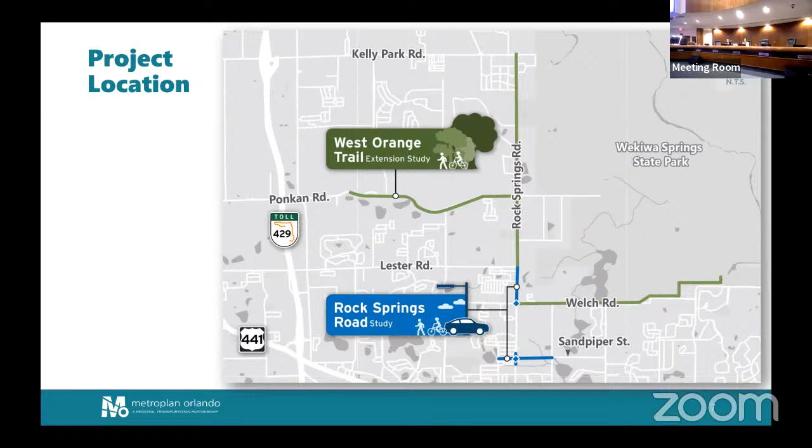The West Orange Trail extension study limits are from the existing West Orange Trail terminus at the intersection of Rock Springs Road and Ponkan Road to the proposed Wekiwa Trail extension at the intersection of Rock Springs Road and Kelly Park Road. The trail extension study is also proposing additional connections to the Wekiwa Springs State Park entrance via Welch Road and to the Wolf Lake Elementary and Middle Schools, as well as the City of Apopka's Northwest Recreation Complex via Ponkan Road. These studies are being done simultaneously due to their proximity and similar schedules.

A traditional project lifecycle consists of 4 steps: planning, design, right-of-way acquisition, and finally construction. We are currently in the planning stage for both projects. During the planning phase, the project need is identified, improvement strategies are evaluated, and a recommendation is selected to move forward to the design phase. Timing for each phase is dependent upon available funding.

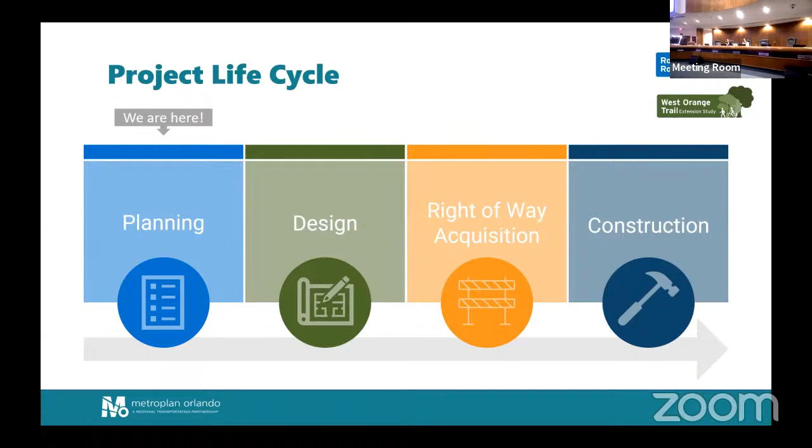So it is essential during the planning phase to have ongoing public engagement, like what we're doing tonight. At the beginning of the study, an online survey was conducted to gather initial input from the needs of the corridor. On January 27th of this year, we conducted our first community meeting to present the alternative concepts for each project. A virtual meeting room was held open to review these concepts through the end of February, in addition to a survey that was given to gather feedback on the alternatives considered. Tonight's meeting is being held to share the study recommendations for public input, and a final survey will be made available following this presentation tonight to gather feedback on the proposed improvements being presented.

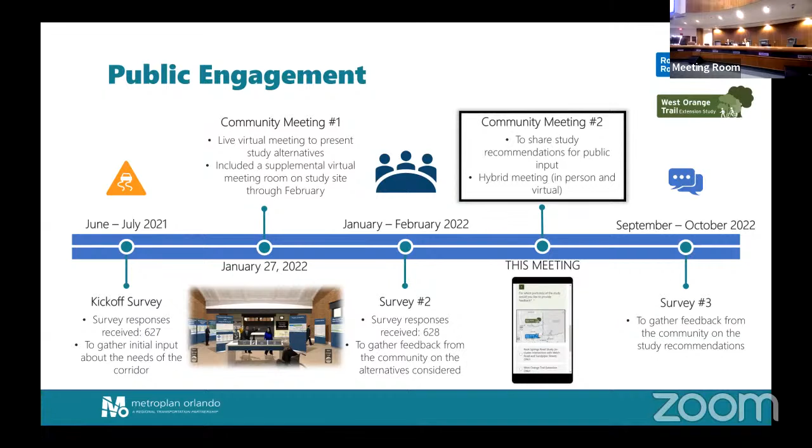So the study recommendations being shown today have been selected as part of the alternative development and refinement process. This process begins with the alternatives development, where alternative concepts are preliminarily evaluated and compared, and then shown to the public for local input. After gathering feedback from the community, the alternatives are refined and analyzed to select the study recommendations to move forward to the design phase of the project.

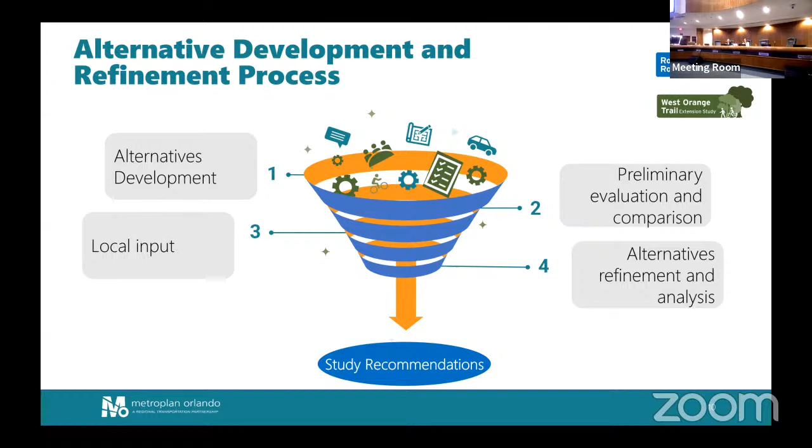Okay, we will now look at the recommendations for each of these studies. We're going to begin with the Rock Springs Road study. We're going to first show you a short clip that's going to include a flyover of a rendering of what the proposed updates will look like along Rock Springs Road corridor if this is selected.

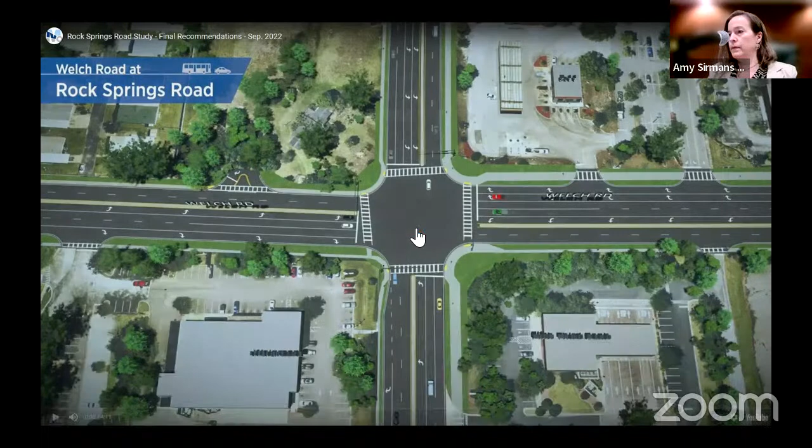The purpose of the Rock Springs Road study is to evaluate safety and access improvements at the intersection of Rock Springs Road and Welch Road, and along the half-mile of Rock Springs Road from Welch Road to Lester Road. The study also includes an intersection analysis and evaluation for the realignment of the intersection of Sandpiper Street with Park Avenue, and recommends improvements to the studied facilities.

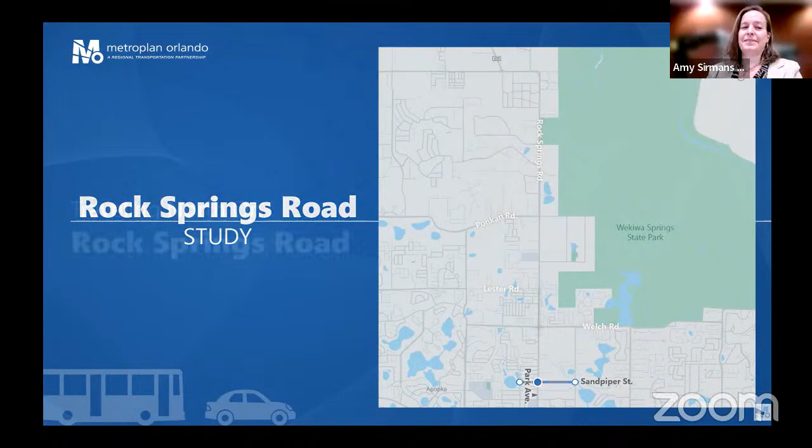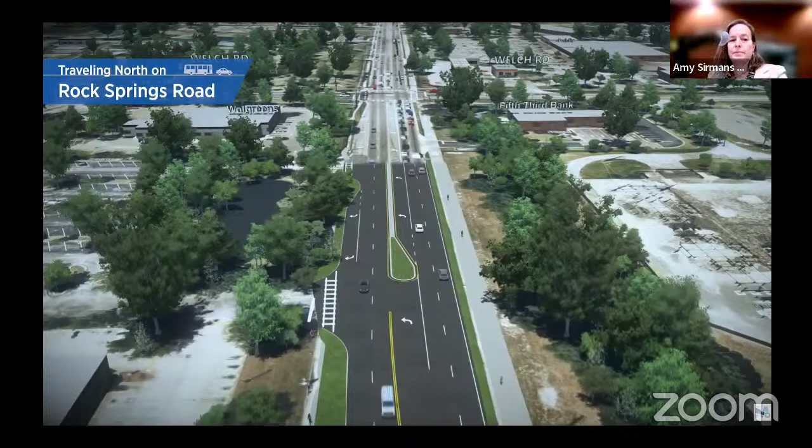Let's start by looking at the recommended design of the Rock Springs Road and Welch Road intersection. Traveling north on Rock Springs Road, the proposed improvements begin just south of the intersection of Rock Springs Road at Welch Road. A new traffic separator begins at the start of the northbound left turn lane.

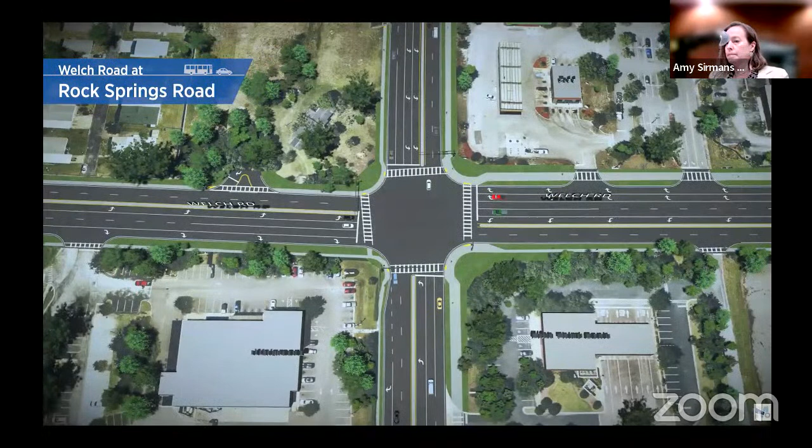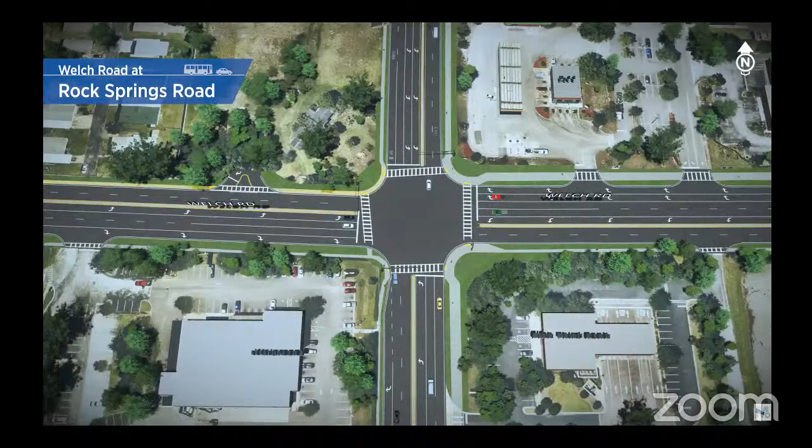At the intersection of Rock Springs Road and Welch Road, the proposed improvements include dual southbound left turn lanes, a dedicated right turn lane for Rock Springs Plaza and Walgreens, and two through lanes for both eastbound and westbound lanes on Welch Road. New traffic separators are recommended between opposing directions of travel at each leg of the intersection to improve safety by restricting left turns out of driveways in the vicinity of the intersection. A new sidewalk runs along the north side of Welch Road from Rock Springs Road to the Palm Isles community.

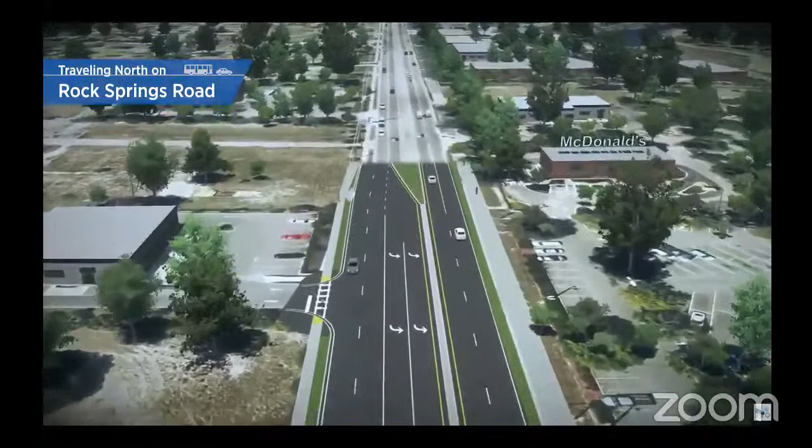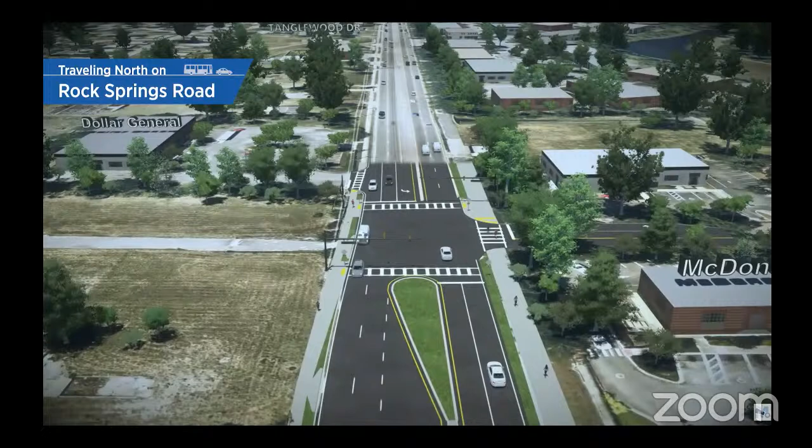Heading north on Rock Springs Road, the traffic separator continues until reaching the north entrance to the Publix Plaza at the McDonald's. At the Publix north entrance, a new signalized intersection is recommended to improve operations and safety. The recommended improvements include a dedicated southbound left turn lane, right and left turn lanes when exiting the plaza, and new pedestrian crosswalks.

The traffic separator begins again on the north side of this intersection and continues north for approximately 320 feet. After the proposed improvements at the intersection of Rock Springs Road and Publix North entrance are implemented, the operations of this intersection will be analyzed. If the improvements do not sufficiently meet the pedestrian crossing needs, the addition of a mid-block crossing with rectangular rapid flashing beacons, also known as RRFBs, will be considered between the Publix North entrance and Tanglewood Drive.

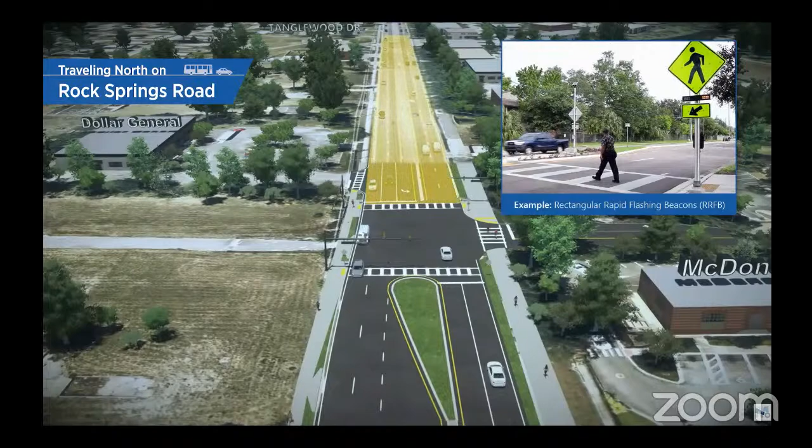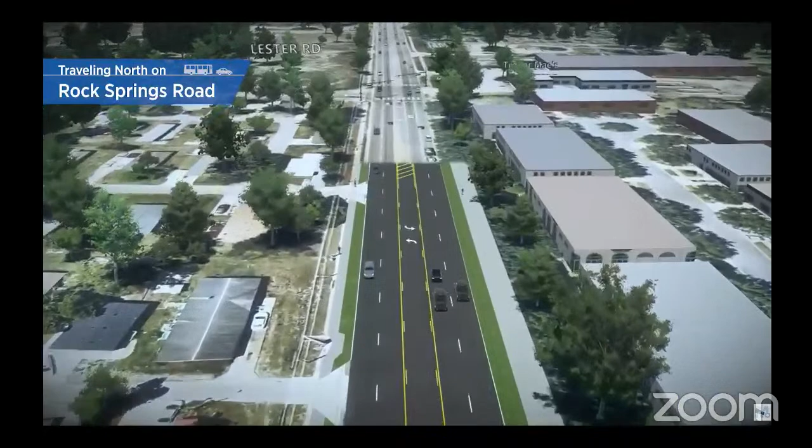The recommended improvements to Rock Springs Road and just north of Lester Road. At the southern end of the corridor,

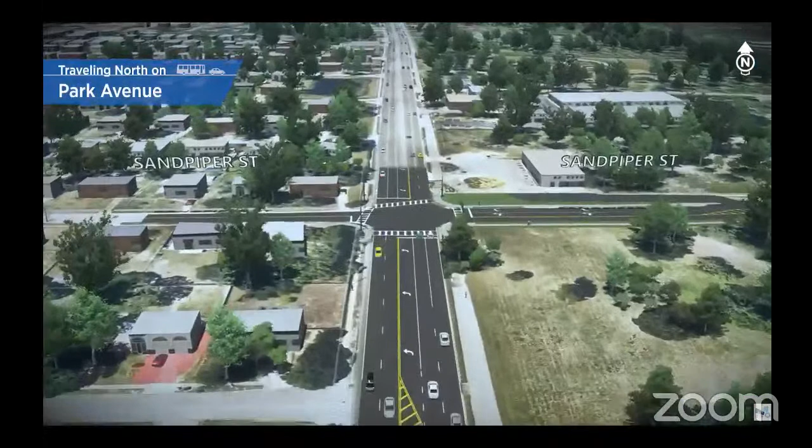improvements are proposed at Park Avenue and Sandpiper Street. Traveling north on Park Avenue, the improvements begin just south of Sandpiper Street. A new traffic signal is recommended at the intersection of Sandpiper Street and Park Avenue.

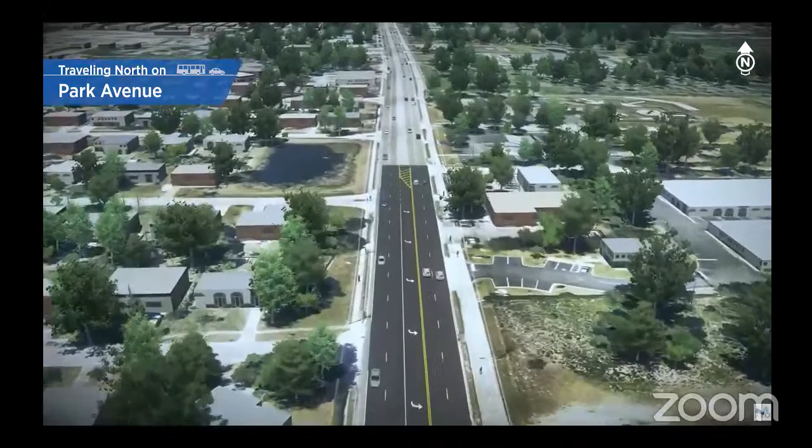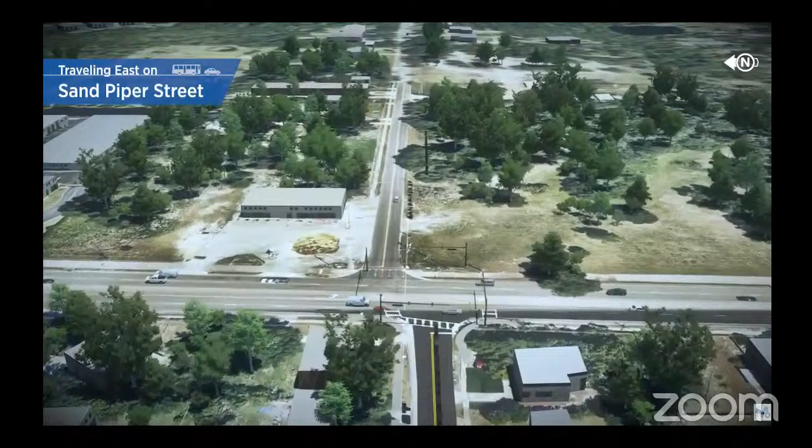Traveling east on Sandpiper Street, the proposed improvements include the realignment of the east leg of Sandpiper Street and a new sidewalk along the south side of Sandpiper Street from Park Avenue to Ustler Road. A new sidewalk is also recommended along the north side of Sandpiper Street from Lake Avenue to Park Avenue.

So to recap what we saw in the video, the following are recommendations to improve operations and safety as part of the Rock Springs Road study.

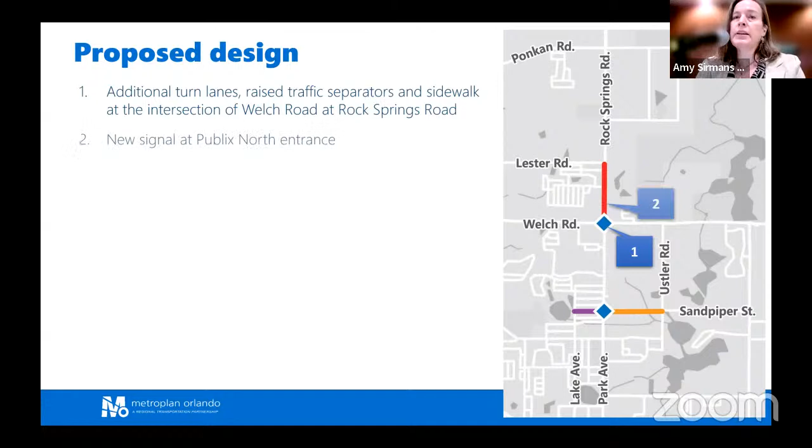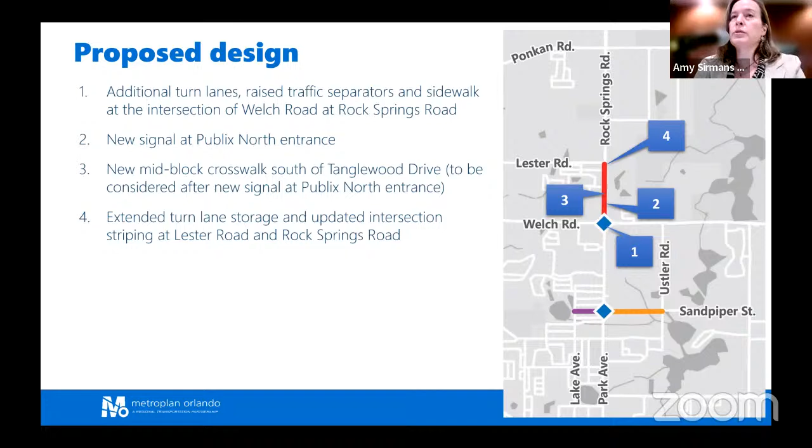Additional turn lanes and raised traffic separators at the intersection of Welch Road at Rock Springs Road. A new signal at the Publix North entrance near the McDonald's and former Bubbaloo's restaurants. A new mid-block crossing or crosswalk south of Tanglewood Drive, which will be considered after the new signal at the Publix North entrance is implemented. Minor intersection updates at the Lester Road and Rock Springs Road intersection to allow for additional space for vehicles in the turn lane. The realignment and a new signal at the Sandpiper Street and Park Avenue intersection. New sidewalk along the north side of Sandpiper Street from Lake Avenue to Park Avenue, and new sidewalk along the south side of Sandpiper Street from Park Avenue to Ustler Road.

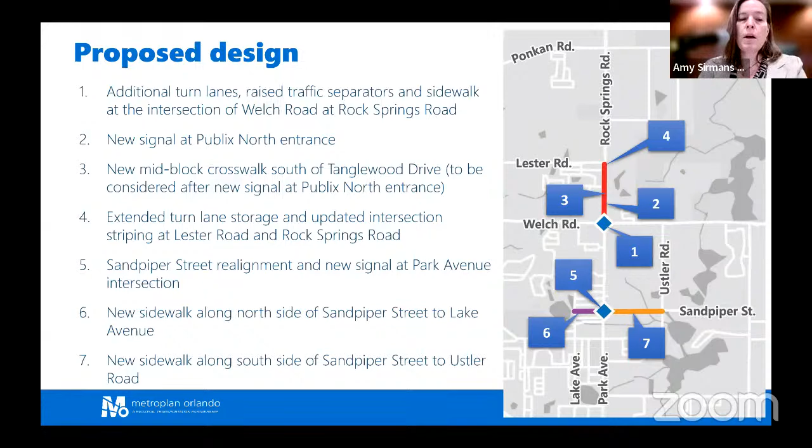The following updates are recommended at the intersection of Welch Road and Rock Springs Road. We're looking at dual southbound left turn lanes and a new traffic separator at the start of the left turn lane at each leg of the intersection to restrict left turns in and out of adjacent driveways, a portion of which will be installed along with the proposed development in the northwest corner of the intersection. Two through lanes for both eastbound and westbound on Welch Road, dual westbound dedicated right turn lanes, and a new sidewalk on the north side of Welch Road from Rock Springs to the Palm Isle community.

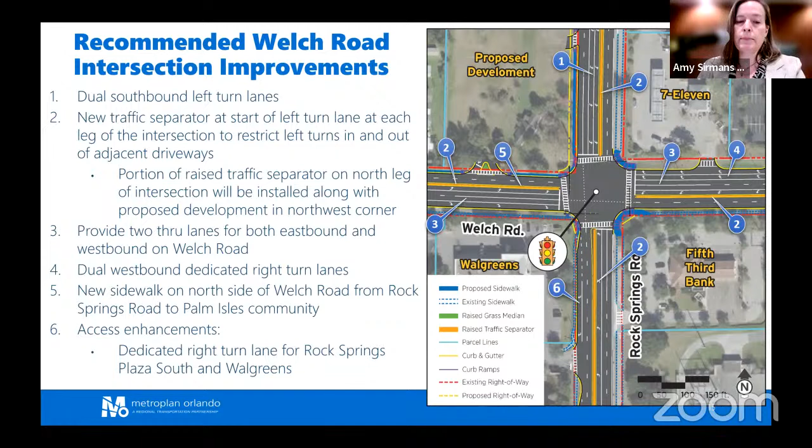Access enhancements are also recommended at the intersection, including a dedicated right turn lane for Rock Springs Road Plaza South entrance and the Walgreens. The recommended traffic separator proposed between opposing directions of travel at each leg of the intersection is a narrow concrete barrier that prevents vehicles from crossing lanes of traffic. The traffic separators will enhance safety by restricting left turns in and out of driveways in the vicinity of the intersection.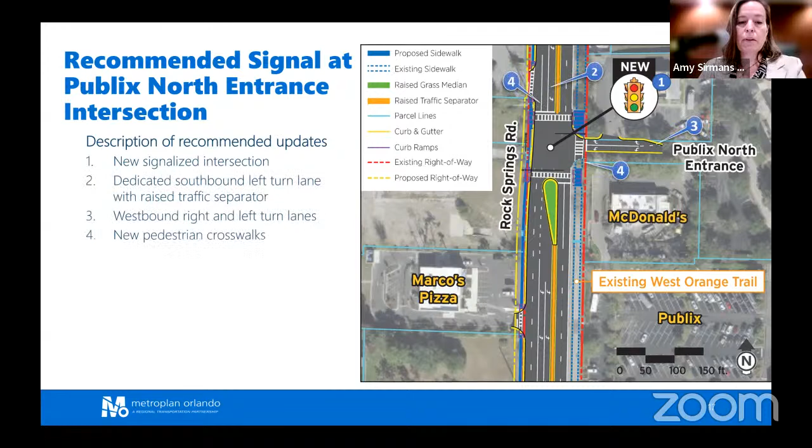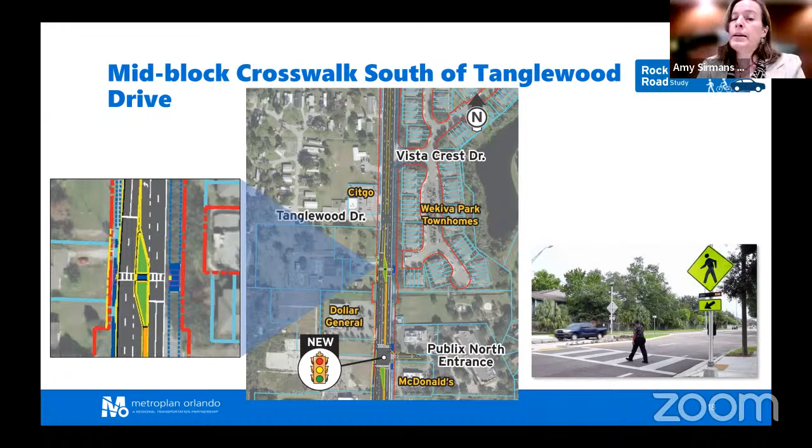A mid-block crosswalk is recommended south of Tanglewood Drive. The mid-block crosswalk includes a raised median island with opportunities for landscape. Rectangular rapid flashing beacons, also known as RRFBs, would be installed along the crosswalk to enhance visibility of pedestrians. This recommendation will be reevaluated based on community needs after the installation of the Publix North entrance signal.

At Sandpiper Street and Park Avenue, the recommended improvements include the realignment of the east leg of Sandpiper Street and the addition of a signal at this intersection.

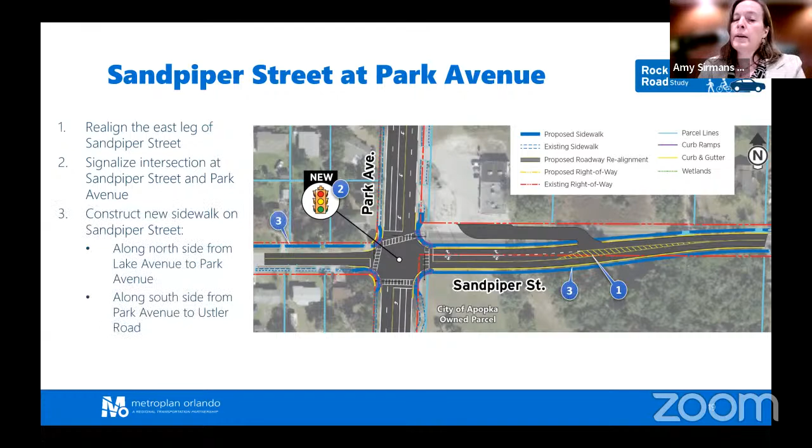The study is also recommending the construction of new sidewalk along Sandpiper Street between Lake Avenue and Ustler Road. The new sidewalk would be provided on the sides of the street that currently do not have sidewalk, specifically along the north side of Sandpiper Street, west of Park Avenue to Lake Avenue, and along the south side of Sandpiper Street, east of Park Avenue to Ustler Road. This would increase sidewalk connectivity to the existing West Orange Trail.

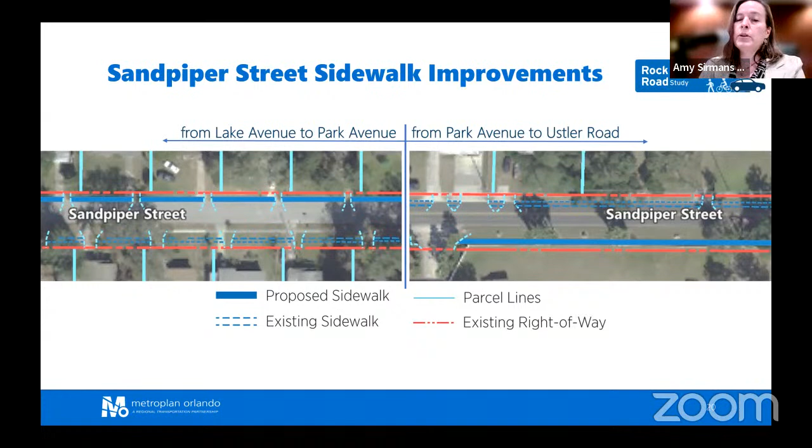An analysis was conducted on these proposed updates to determine associated environmental, community, and drainage impacts, as well as estimated total costs. An environmental analysis determined a low potential for impacts to listed species and habitats and contamination sites within the study area. There are no wetlands or surface waters located along the study corridor, and therefore no impacts are anticipated. The recommended updates are anticipated to require 0.55 acres of right-of-way, in which a portion of the right-of-way needed is planned to be donated from the upcoming development in the northwest corner of the Welch Road at Rock Springs Road intersection. Overall, the recommended updates are anticipated to enhance the community.

Regarding the drainage, the existing ponds receiving runoff from the project area have additional capacity, therefore no additional pond sites are needed. The estimated construction cost for the Rock Springs Road updates is $6.5 million, and the construction cost for the Sandpiper Street updates is $1.6 million.

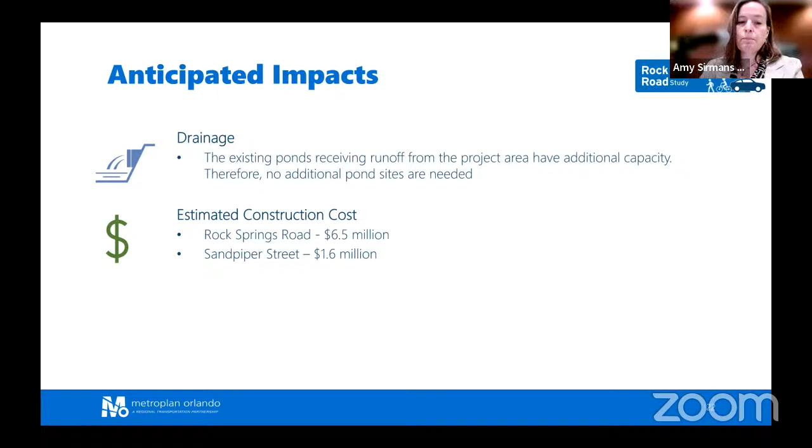We will now briefly review the Rock Springs Road study traffic analysis results. Using an evaluation measure called level of service, also referred to as LOS, we are able to relate the quality of service for a mode of travel. These figures illustrate the traffic served under conditions ranging from level of service A to level of service F. Similar to grades in school, a roadway that performs at level of service A is not congested and supports free-flowing travel. A roadway that receives a failing grade experiences heavy congestion and significant delays, as depicted in the level of service F exhibit.

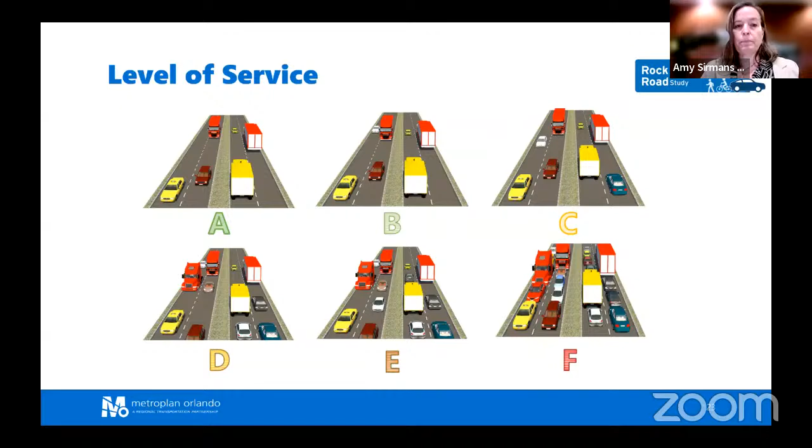The existing traffic data was collected and analyzed along the study corridor. The target level of service assigned for the study corridor is level of service E.

The existing traffic analysis shows the Welch Road at Rock Springs Road intersection in both the AM and PM peak periods does not operate at acceptable level of service, as well as the Sandpiper Street at Park Avenue intersection in the PM peak period.

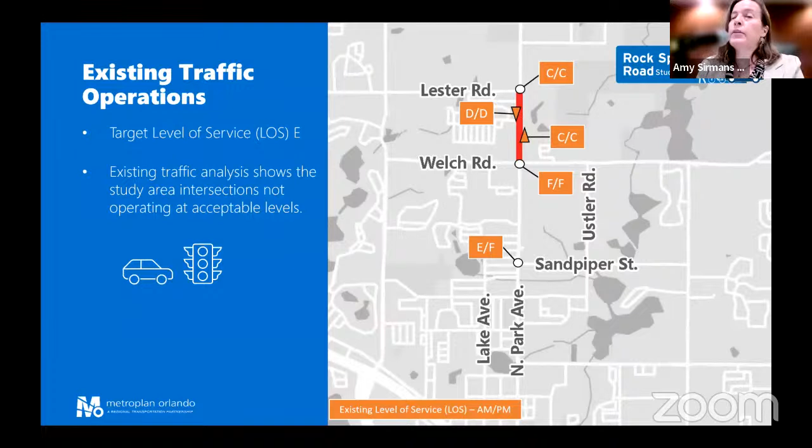Utilizing future growth projections and traffic models, a long-term growth factor was applied to project the traffic volumes within the study area to a future year of 2045.

With no additional improvements to Rock Springs Road, it is expected to experience much higher delays in the future year 2045. With the addition of proposed improvements, all operations result within the target level of service of E.

There is a reduced overall delay at the Welch Road intersection by 74% in the 2045 morning and by 72% in the 2045 PM. By implementing the proposed improvements to the corridor, the Welch Road intersection operates at acceptable levels.

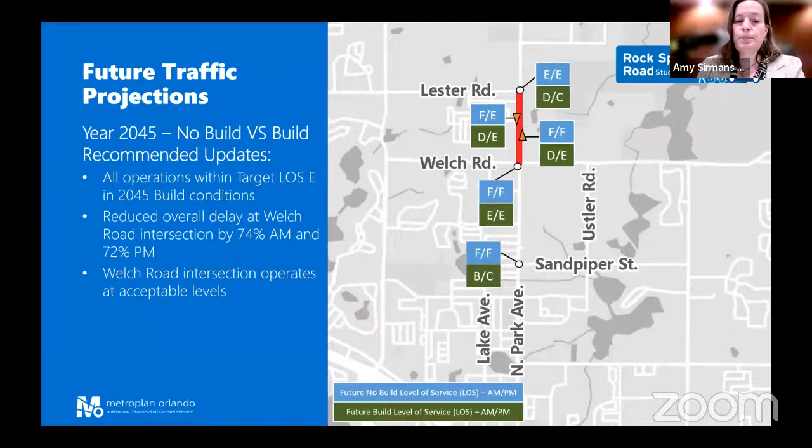Now we're going to review some of the details about the proposed updates for the West Orange Trail extension. We're going to start with a short clip similar to the previous one of a flyover rendering of what the trail could look like.

The Orange County Trails Master Plan identifies a gap in the regional trail network between the northern terminus of the existing West Orange Trail and the southern terminus of the Wekiva Trail.

Through the existing conditions analysis, public involvement feedback, and input from local agency stakeholders, several alternatives were identified to extend the West Orange Trail to the proposed Wekiva Trail, while providing connections to the Wekiva River Blueway Trail and Wolf Lake Elementary and Middle Schools, as well as the City of Apopka's Northwest Recreation Complex.

This video will take you through the recommended concept for the West Orange Trail extension and its spurs.

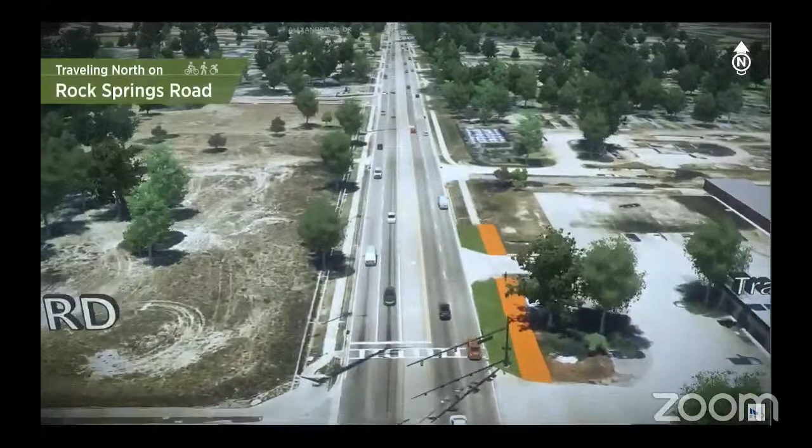The recommended trail extension is shown in orange as we have been traveling north along Rock Springs Road. The trail runs along the east side of Rock Springs Road, starting from the existing trail terminus at Lester Road until reaching Kelly Park Road.

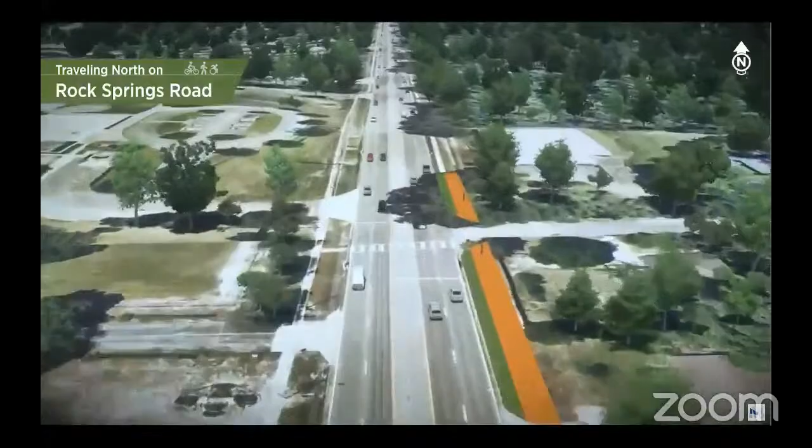The proposed trail is 12 feet wide to accommodate both bicyclists and pedestrians and adds approximately 3.3 miles to the West Orange Trail network. This portion of the West Orange Trail extension crosses 5 streets and 58 driveways.

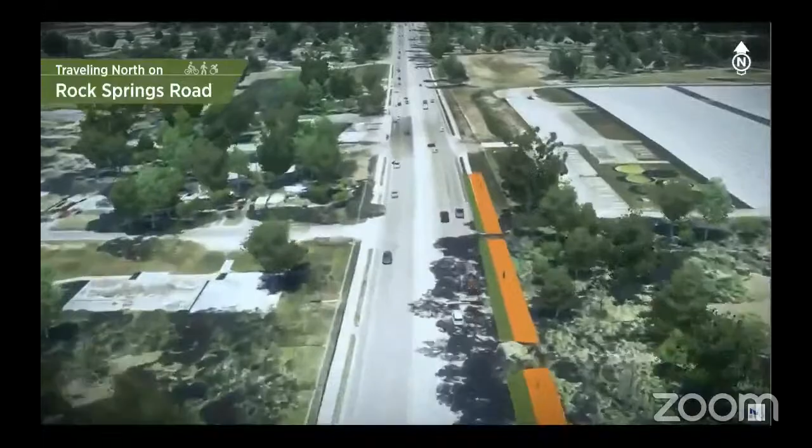The street crossings include Fay Street, Ponkan Road, Trailer Haven Lane, Pine Street, and Holly Street. In order to build this portion of the West Orange Trail extension, approximately 2.5 acres of right-of-way will be needed.

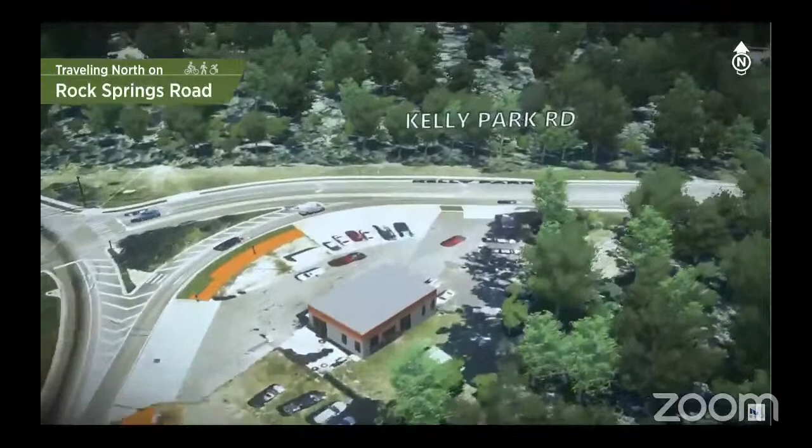As we reach Kelly Park Road, the recommended trail turns right to travel east along the south side of Kelly Park Road, and then north along the east side of Baptist Camp Road, ending at the entrance to Kelly Park.

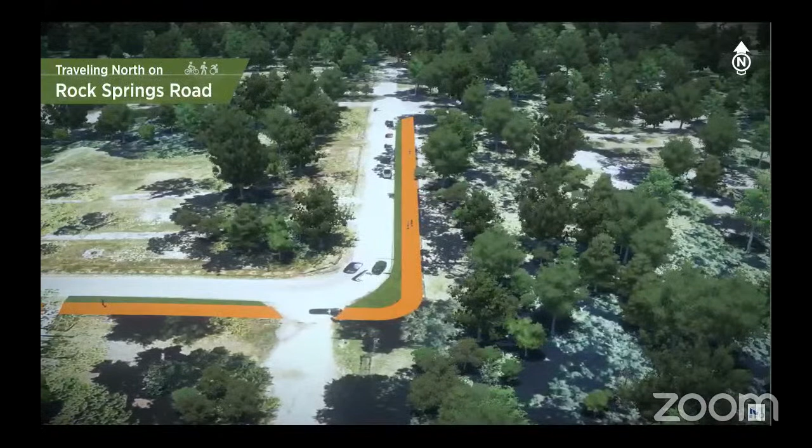Now we will take a look at the proposed concept for the Welch Road Spur. Traveling east on Welch Road, the recommended 12-foot wide trail spur alignment runs along the north side of Welch Road from Rock Springs Road to the entrance of Wekiwa Springs State Park.

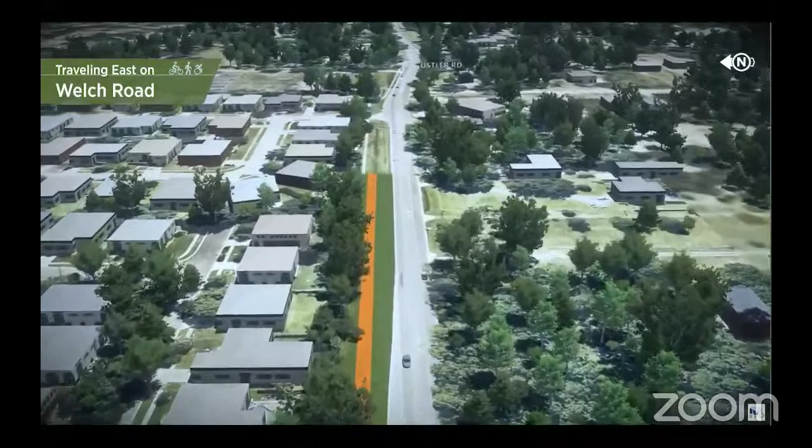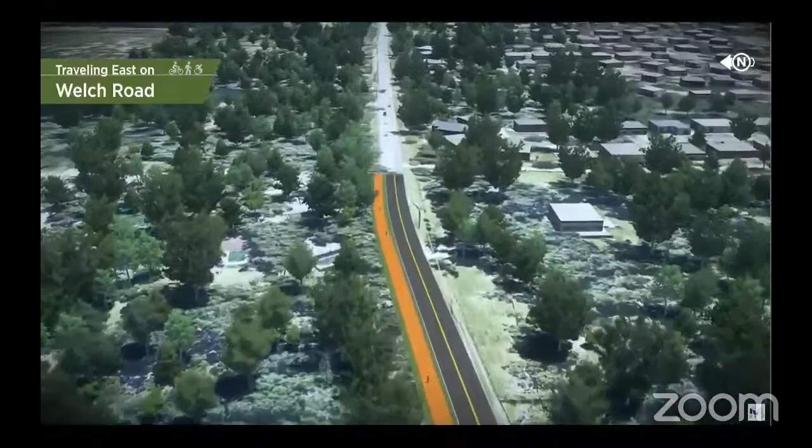As part of the recommended trail spur, Welch Road requires a roadway realignment beginning at Ustler Road in order to provide space for the trail and avoid impacts to the wall at the Wekiwa Glen subdivision. The roadway realignment will remain within the existing right-of-way.

Just west of Thompson Road, the recommended trail spur includes 2 potential locations for a natural habitat observation area. The observation areas will serve as a place to rest and provide an opportunity for wildlife viewing along the trail.

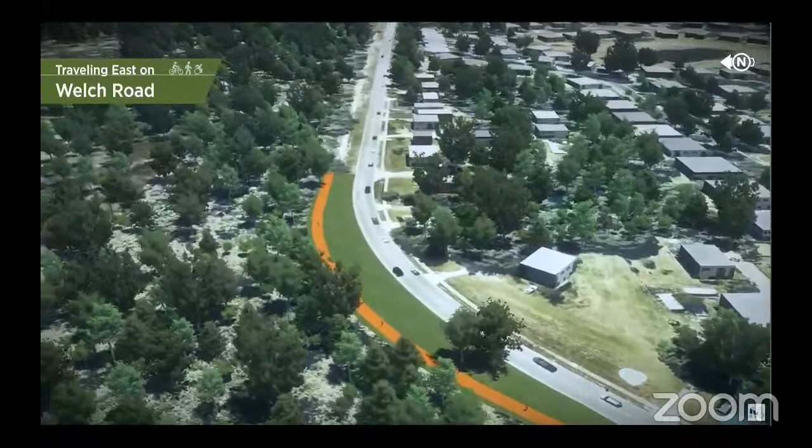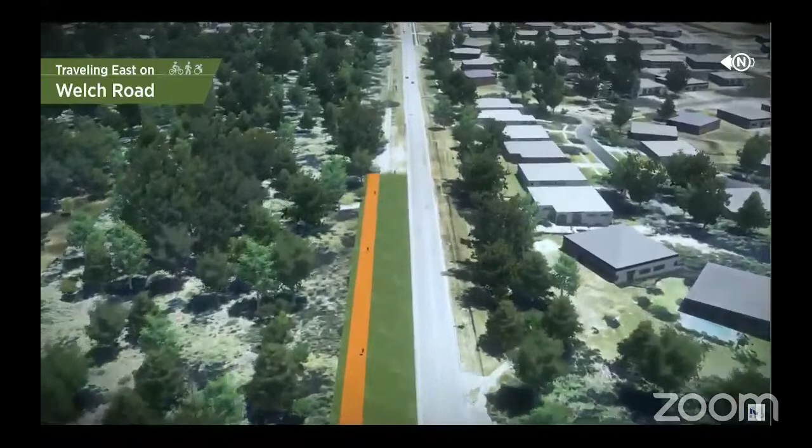The trail continues along Welch Road until just west of Sweetwater Park Village. Here, the trail heads north, then east, wrapping around the edge of the neighborhood within the Wekiwa Springs State Park property.

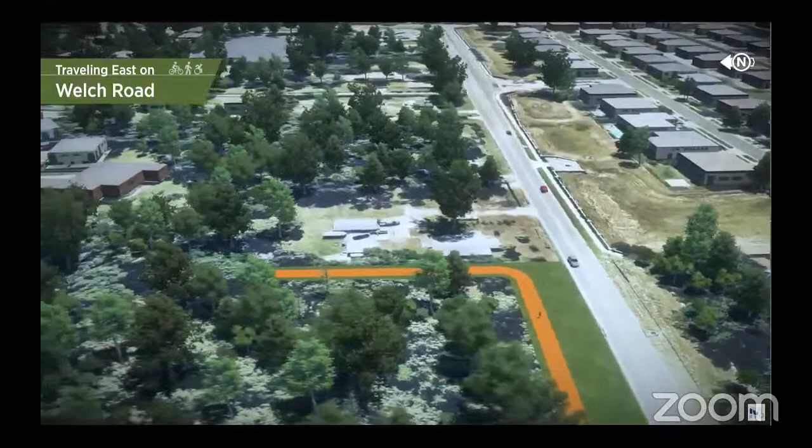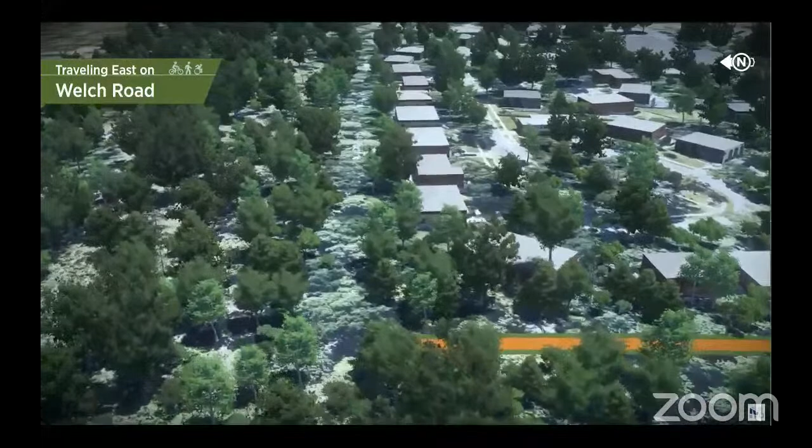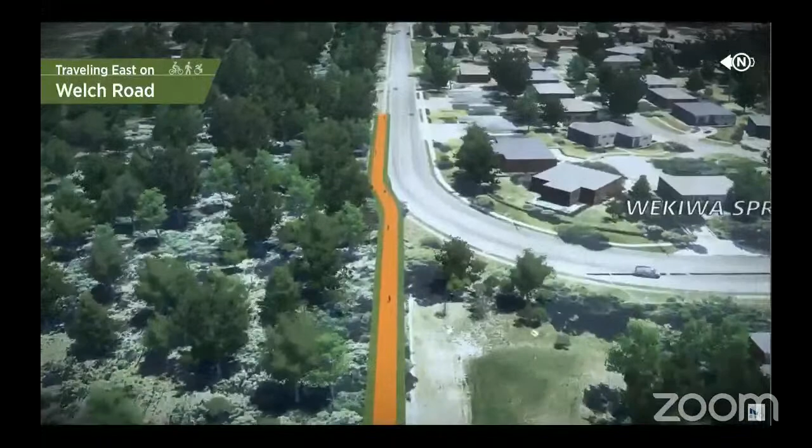The trail then connects with Wekiwa Springs Road, continuing east until the entrance to Wekiwa Springs State Park. The Welch Road Spur is approximately 3 miles in length and requires an estimated 7.3 acres of right-of-way, of which only 0.1 acres is privately owned.

The final trail spur alignment is along Ponkan Road to connect the West Orange Trail to Wolf Lake Elementary and Middle Schools, as well as the City of Apopka's Northwest Recreation Complex. Heading west from Rock Springs Road, the proposed trail spur runs along the south side of Ponkan Road from Rock Springs Road to Vic Road.

The trail will cross Ponkan Road on the east side of the Vic Road intersection, where there is an existing signal providing for a protected crosswalk.

From this intersection, the trail continues along the north side of Ponkan Road until reaching the entrance to Wolf Lake Elementary School. The recommended Ponkan Road spur is approximately 2.3 miles in length and requires an estimated 2.1 acres of right-of-way.

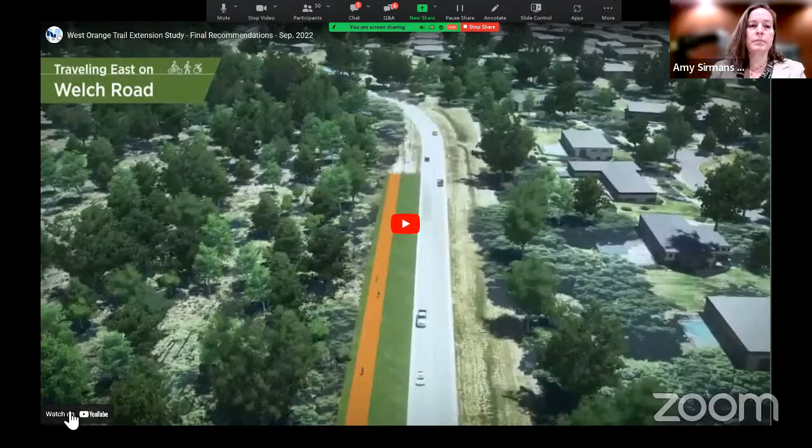So to recap from the video, the West Orange Trail Extension Study is looking at 3 different corridors: Rock Springs Road from Lester Road to Kelly Park Road, Welch Road and Wekiwa Springs Road from Rock Springs Road to the Wekiwa Springs State Park entrance, and Ponkan Road from Rock Springs Road to the Wolf Lake Elementary and Middle Schools.

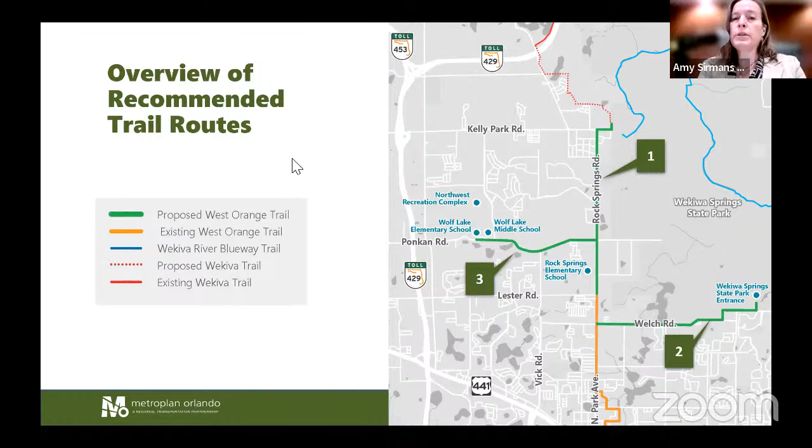Along Rock Springs Road from Lester Road to Kelly Park Road, the recommended trail extension alignment is kept along the east side of Rock Springs Road to tie into the proposed Wekiva Trail.

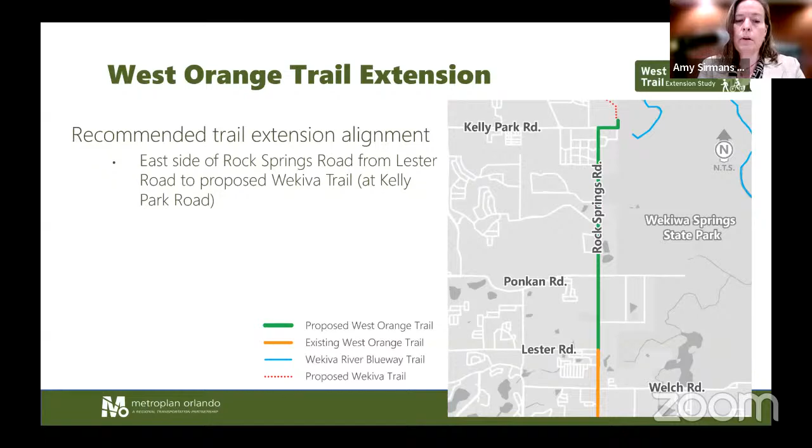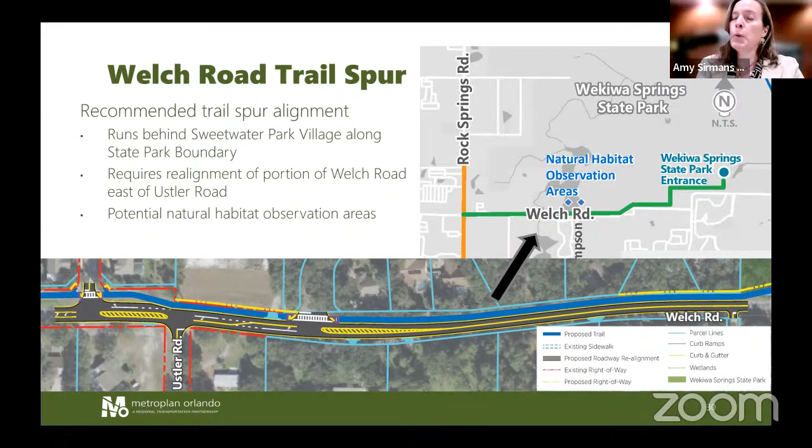Traveling east, the trail will run along the north side of Welch Road until just west of Sweetwater Park Village. Here, the trail heads north, then east, wrapping around the edge of Sweetwater Park Village within the Wekiwa Springs State Park property. Finally, the trail connects with the north side of Wekiwa Springs Road, continuing until the entrance to Wekiwa Springs State Park. The recommended Welch Road Trail spur will provide a connection to the park entrance with fewer driveway and street crossings.

The trail would follow the forest edge, providing the opportunity for more wildlife viewing away from the roadway. The Spring to Spring Trail in Volusia County is an example of what this portion of the trail could look like. The design and vegetation plans for the Welch Road Wekiwa Springs State Park alignment have not yet been developed. During the design phase, fencing may be considered to provide a buffer between the proposed trail and existing properties.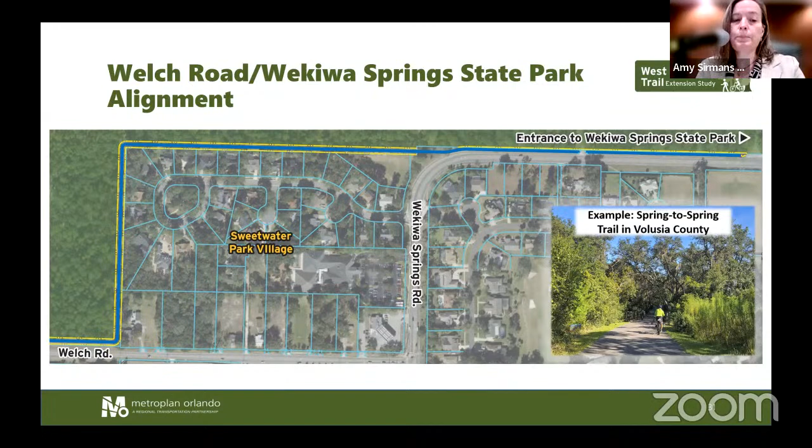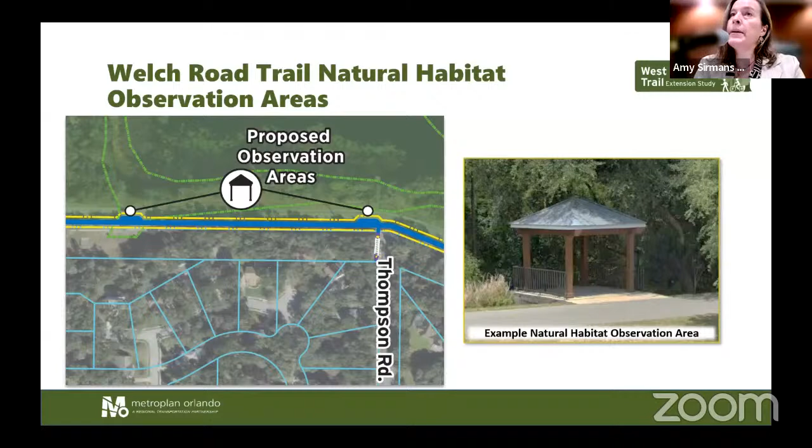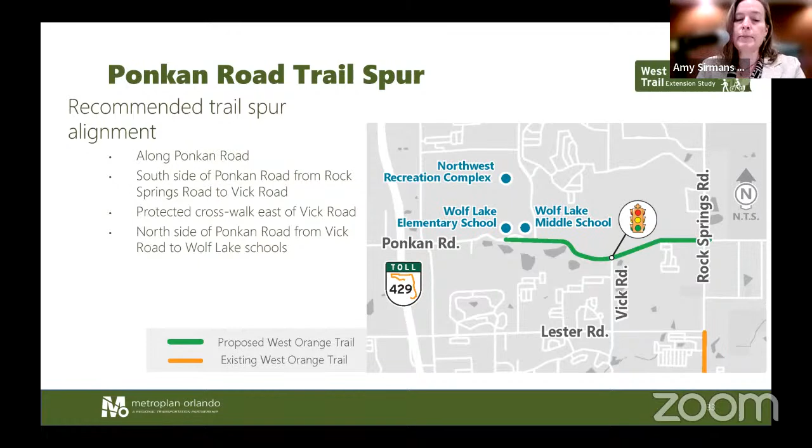An analysis was conducted on the West Orange Trail Extension Study to determine the associated environmental, community, and drainage impacts, as well as the estimated construction cost.

An environmental analysis determined a moderate potential for impacts to wildlife due to the proximity to Wekiwa Springs State Park and forested areas. 12 listed wildlife species have the potential to occupy habitats within or adjacent to the proposed trails on Welch Road and Ponkan Road. Along Rock Springs Road, there is a low potential for impacts to listed species.

There is a low potential for impacts to wetlands along Rock Springs Road and Ponkan Road. 2 wetland areas are located along Welch Road. During the design phase, efforts will be made to mitigate unavoidable impacts to wetlands in accordance with state and federal wetland permitting requirements. Regarding contamination, 39 sites are found adjacent to the 3 trail alignments; however, the proposed trails are not likely to impact any of the listed sites.

For community impacts, our analysis determined a low potential for impacts to archaeological and historical resources. We understand that the proposed trail runs adjacent to existing residential communities along the Wekiwa Springs State Park boundary. Overall, the proposed trails are anticipated to enhance the community by providing access to recreational facilities, as well as provide the local community with an alternate mode of transportation.

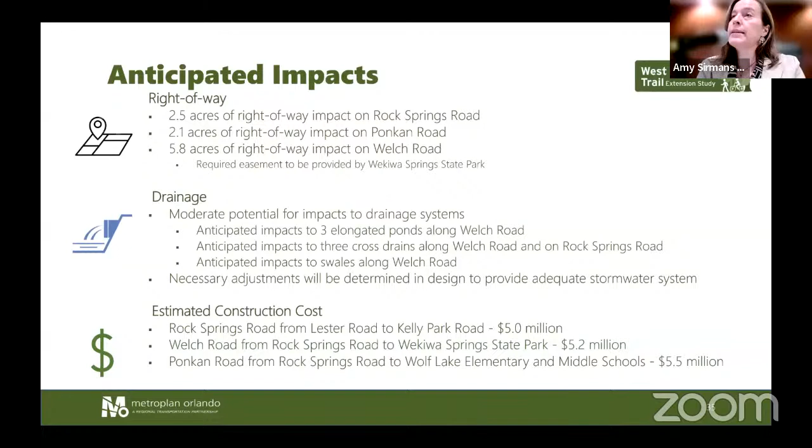The estimated construction cost for the trail along Rock Springs Road from Lester Road to Kelly Park Road is $5 million. The estimated cost for the trail spur along Welch Road from Rock Springs Road to Wekiwa Springs State Park is $5.2 million. The cost for the trail along Ponkan Road from Rock Springs Road to Wolf Lake Elementary Middle Schools is estimated at $5.5 million.

We began these planning studies in early spring of 2021, and we expect them to be completed at the end of this year. Following this public meeting, the study team will finalize the study recommendations to move into the design phase of the project.

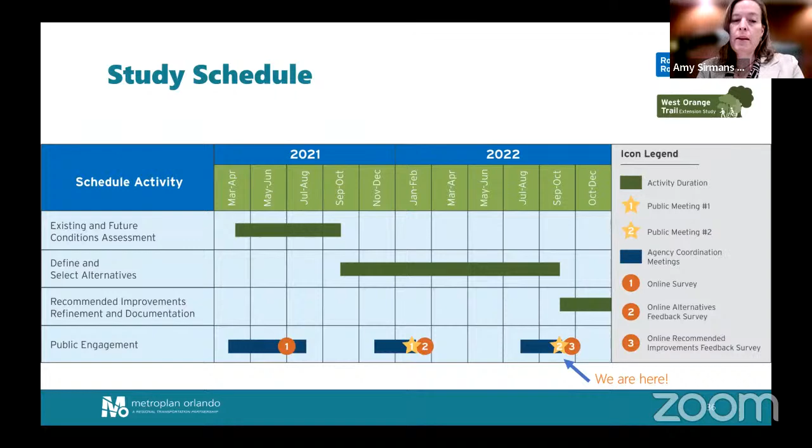In addition to participating in the live question and answer session following this presentation, there are several ways you can get involved and provide feedback on the study. The best way to provide feedback is to fill out a survey on the recommended improvements.

You can visit bit.ly/RSRWOTSsurvey3, shown on your screen, to fill out the survey, or submit your comments directly from the project website at metroplanorlando.org/rocksprings. In-person attendees can fill out a comment form and hand it to any project team member. You may also email your comments and questions to the project manager, whose contact information will be provided again at the conclusion of this presentation.

To allow the project team to finalize the study recommendations within the previously shown schedule, we ask that you please submit your survey responses by October 20th.

If you would like to participate in the live question and answer session, please use this time to submit your questions or comments on the study. For those participating via Zoom, please submit your comments to the Q&A box on the Zoom control panel. In-person attendees may fill out a comment card and raise your hand for a project team member to collect your completed card.

During the live Q&A session, a moderator will take turns reading questions submitted online and in person. Our team of panelists will address your comments in the available time after the live presentation. If a question is not answered during the live Q&A forum, a response will be provided via email following the public comment period.